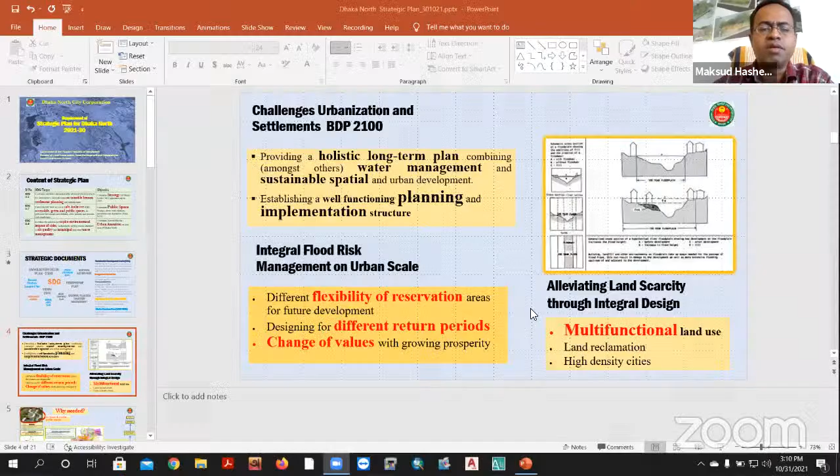First thing, I was posted in this Dhaka North City Corporation early this year. I thought there should be a strategic plan at city scale, so I was making a TOR for a strategic plan of Dhaka North City Corporation covering city management activities. We do have that content of a strategic plan.

First, we should formulate a strategy for this North City, including a public space strategy, which is the most active part of the city. We also have urban amenities like solid waste management, community health, and so on. If we see the strategic documents at national level, we have the Bangladesh Delta Plan, SDG, Transport Plan, the 8th Five-Year Plan, and the Perspective Plan. These are all policy level documents.

So we should make some spatial interpretation of these. First, if we see the Delta Plan, our first strategic level plan, it speaks about a holistic, long-term plan blending water management and spatial development, with a well-functioning planning and implementation structure. It includes integral flood risk management, flexibility of reservation areas, different return period designing, and changing values with growing prosperity. It also speaks about multifunctional land use planning.

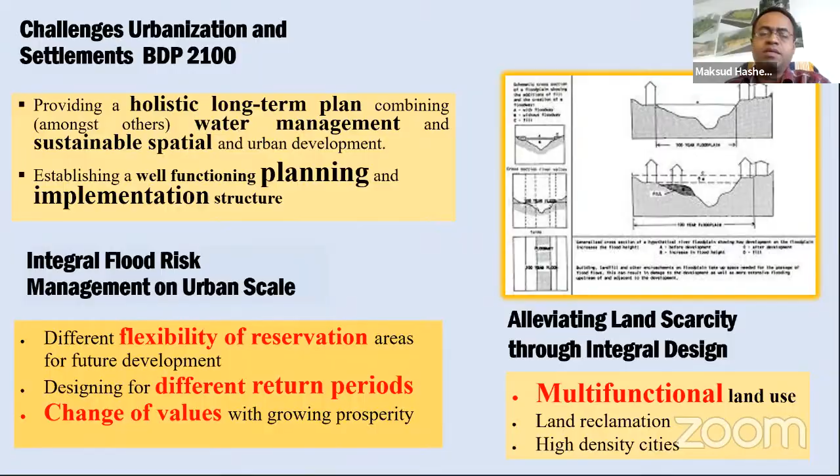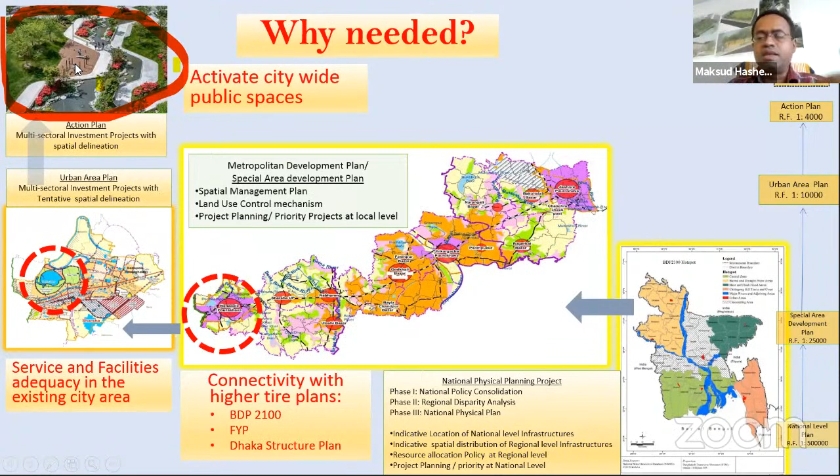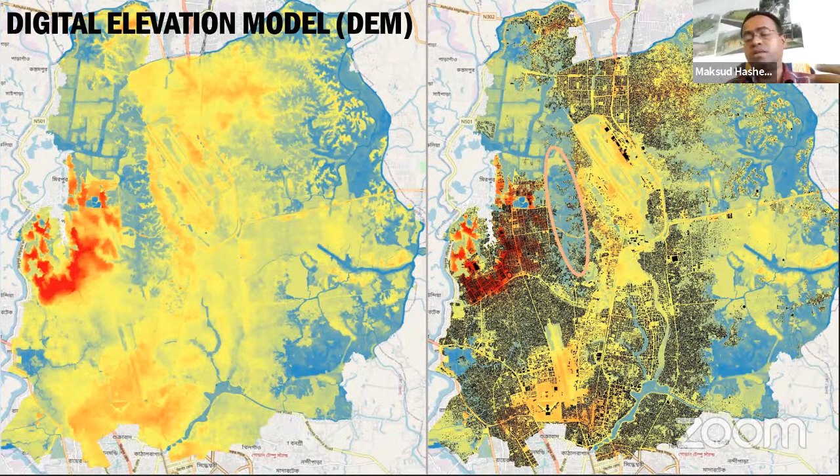If you see the digital elevation model of Dhaka, we see ups and downs—some up areas shown in red, and some lowlands. These ups and downs, the elevation, should come under planning considerations during the design and planning of city management or city infrastructure.

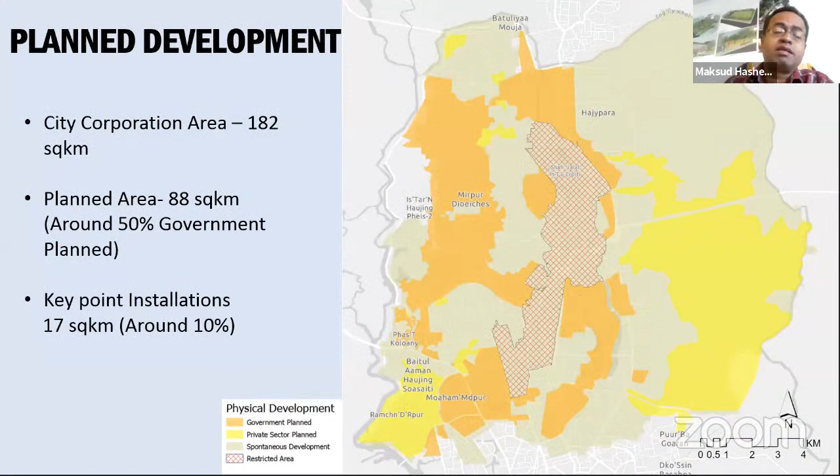If we look at the total city, almost everyone says Dhaka is a very unplanned city. But if we see this map, about 50% of the city area is planned—meaning we have a regular grid-iron pattern, half developed by government bodies like PWD, NHA, RAJUK, and some by private developers. About 10% of the inner area consists of key point installations like airports, Dhaka cantonment, etc.

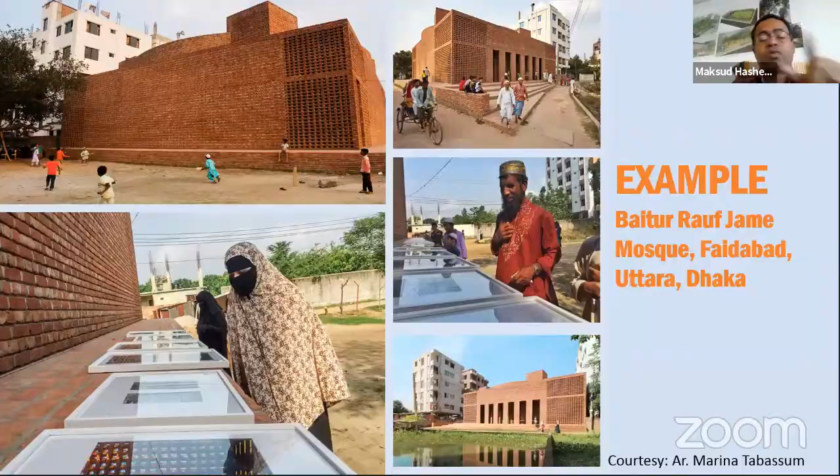আরেকটা বিষয় হচ্ছে ঢাকার পার্ক অ্যান্ড ওপেন স্পেস। এগুলোকে কমিউনিটির সাথে অ্যাক্সেসেবল এবং ইউজেবল করা একটা বড় কাজ, এবং স্পেশাল নিড যাদের আছে, ডিসেবল পিপল, তাদের অ্যাক্সেস নিশ্চিত করা দরকার। এগুলোর একটা লং ক্লক সাইকেল আছে, ২৪ ঘণ্টার সাইকেল, সব বয়সের এবং এজ গ্রুপের লোকের জন্য যাতে এটা ব্যবহার করা যায়। আরেকটা জিনিস হচ্ছে ঢাকা স্ট্রাকচার প্ল্যানে আমাদের একটা গ্রিন করিডোর প্ল্যানিং আছে। এটাকে ব্যবহার করে আমরা যদি কমিউনিটি পর্যায়ে পার্ক এবং প্লেগ্রাউন্ডগুলোকে গ্রিন নেটওয়ার্ক দিয়ে ইনক্লুড করতে পারি, তাহলে আমাদের ইকোলজিতে একটা বড় কন্ট্রিবিউশন চলে আসবে।

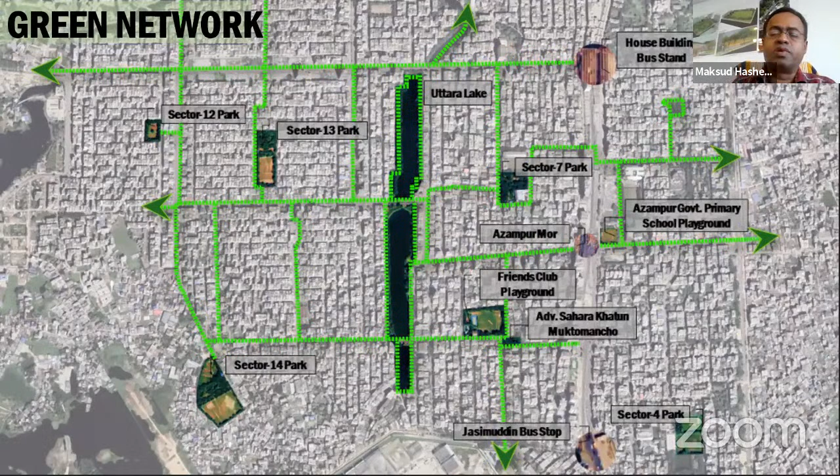And another thing is our blue network. If you can use these canal networks for transportation, recreation, and public space integration, that will add a great value towards Dhaka.

Another thing is community health. Last time during this pandemic period, DNCC converted one DNCC market into a Corona Hospital. So that was a great asset. I think higher order health facilities should also be provided by the Dhaka North City Corporation.

Another thing is bus stops. If you can facilitate this bus stop or transit oriented development, the current lifestyle or quality of life will increase much more.

One of the major functions of Dhaka City Corporation is maintaining solid waste management. So we have only one sanitary landfill, and it's outside Dhaka North. So we are trying to plan 2 or more sanitary landfills within the city that will contribute to less carbon emission, less timing, and the process will be much better. So this is all. Thank you, everyone.

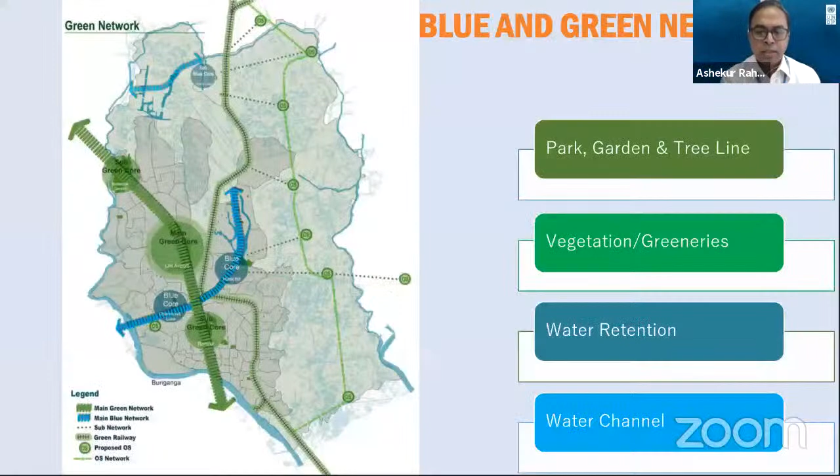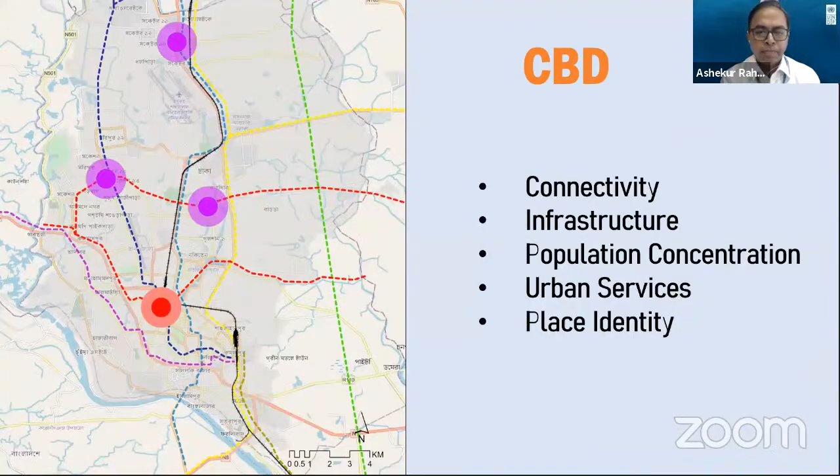Thank you, Mr. Maksud Hashem. I think this has been a wonderful presentation, very stimulating, and thank you also for staying within the time limit. So I hope this will spark a lot of questions, feedback, and comments. You have taken us through the present urban planning discourse of Bangladesh, given us some idea about the urban planning ecosystem, underscored the issues of the land use plan, focused on the public space, brought in the concepts of the green network and the blue network, and touched on transport and sewage management issues. I think this is very relevant and pertinent to the subject matter of today's technical session. I hope our panelists will shed further light on this, and we may get back to you again if there are any questions, and we might have other opportunities to hear a little bit more from you.

So now at this stage, I would like to invite Jerry Chen, who is the senior urban economist of the World Bank. Jerry is an MIT graduate, and an infrastructure investment professional with experience in the public sector, private sector, and multilateral financing institutions, covering different parts of Asia, including North America, Sub-Saharan Africa, and the Middle East region. He has been working with the bank based in DC, particularly as sector coordinator for urban infrastructure and disaster risk management. So with that, Jerry, thank you for agreeing to make an intervention and connecting today. Over to you.

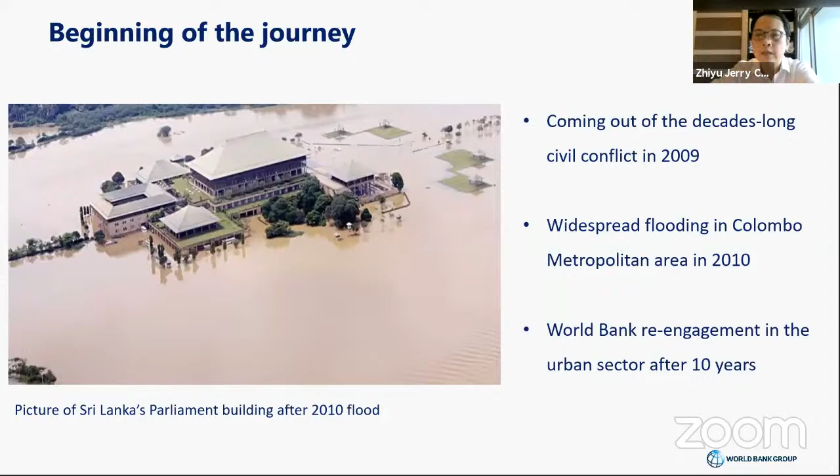So at 2010, we were discussing with the government then how do we support them, and what is the government's grand vision to start to revitalize the capital region of Sri Lanka. It needs to start from somewhere.

After a lot of discussion, we made a decision with the government together to take one entry point: to tackle the urban flood issue through World Bank support. I think Mr. Maksud also mentioned this important issue. It's very relevant for Dhaka and for Bangladesh in general.

But we also agreed it shouldn't just look at the urban flood issue. It should take urban flood management as an entry point, but also stimulate broader urban transformation, which was critically needed at the time for the country to stimulate growth, revitalize economic development, and create jobs for the people. These two points were very clear and were considered the principles of our re-engagement.

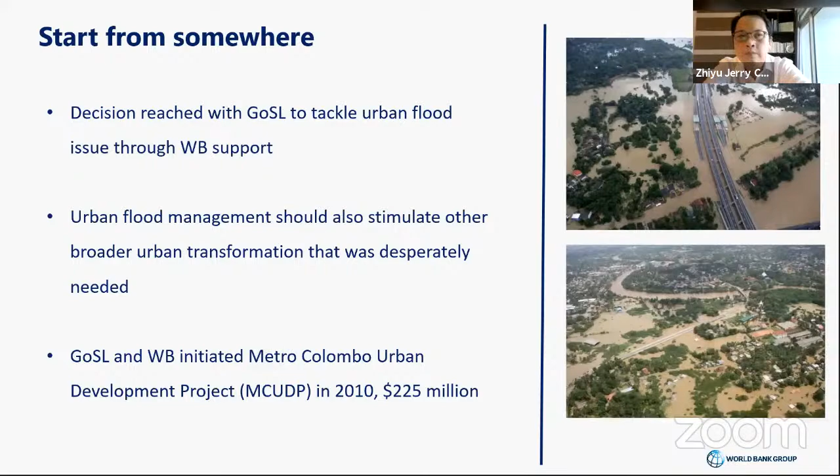Within that background, the Government of Sri Lanka and the World Bank initiated a project, World Bank financed, called the Metro Colombo Urban Development Project, MCUDP, in 2010, totaling 225 million USD. As of today, the project is more than 95% implemented and disbursed, with only one big package remaining, to be completed soon. So I'll be able to show you some of the interesting results.

I think everything, as we have this high-level agreement with government, all the work needs to start from evidence-based planning. So we looked at the Metro Colombo water basin area, which goes beyond the city municipal boundaries, including quite a few municipalities, including Colombo Municipal Council. There was also a lot of hydraulic modeling work done, very rigorous, with a very prestigious international firm supported by the World Bank, and we did a lot of rainfall data update.

It was very interesting — as we did that in 2010, what we realized is what used to be a 50-year return period rainfall intensity at the time had become a 20-year return period. So we did see the real impact of climate change through collecting and updating this data.

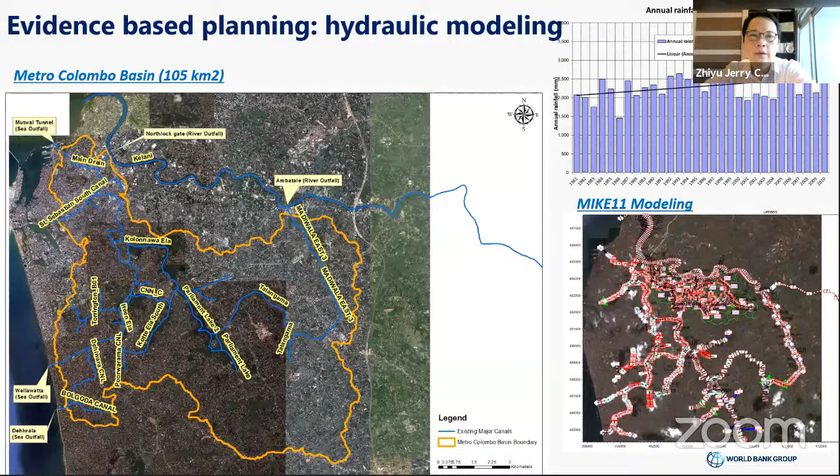So the overall strategy we took, which is also the hydraulic strategy, is that at the upstream part we should try to divert the water. We have a lot of investment identified to support that strategy, so the water doesn't come into the Colombo water basin to the extent possible. While in the middle part of the Colombo metropolitan region, we should try to retain — so a lot of retention capacity is needed and needs to be created and preserved.

I'll also talk about an interesting project on wetland later in my presentation. When it comes to the downstream part of the water basin, we should try to discharge to the extent possible, letting the water go out to the sea. So we had a lot of investment, basically rehabbing outlets to the seafront from the drainage system.

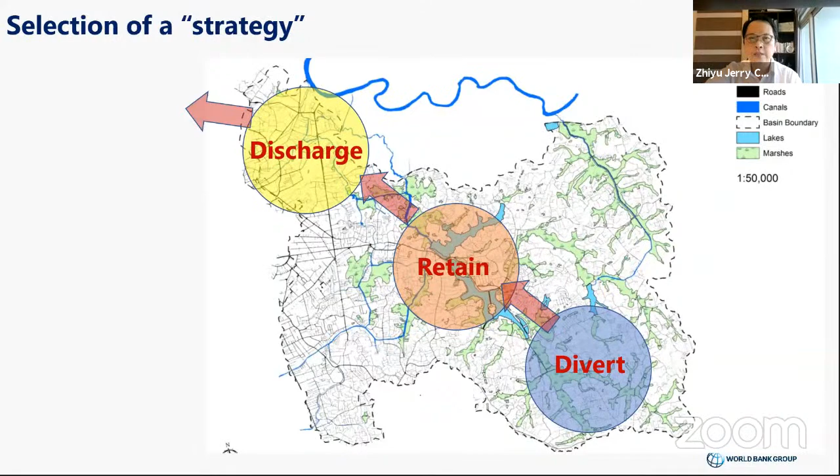That's an overarching strategy, which at the time was very clear and strong. As we go out to stakeholders, people very quickly understand what we want to do, because if you show them a list of 30 or 50 projects, people usually don't fully understand the rationale or idea behind it. So this was the scheme we used a lot at the early stage of the project design phase.

This is a very holistic process and plan that brought us to this investment identification stage. So this didn't come out on an ad hoc basis - it's not just saying I want to do this and I want to do that. That's not how it worked.

What's also important is that after implementing all these investments, we know what the end result will be. And the end result is not zero flooding in Colombo region - no city in the world can afford zero flooding. So we can only ensure a reduced level of flooding according to certain return periods of rainfall and the level of water tide from Kelani River, the bigger river on the northern side of the metropolitan region.

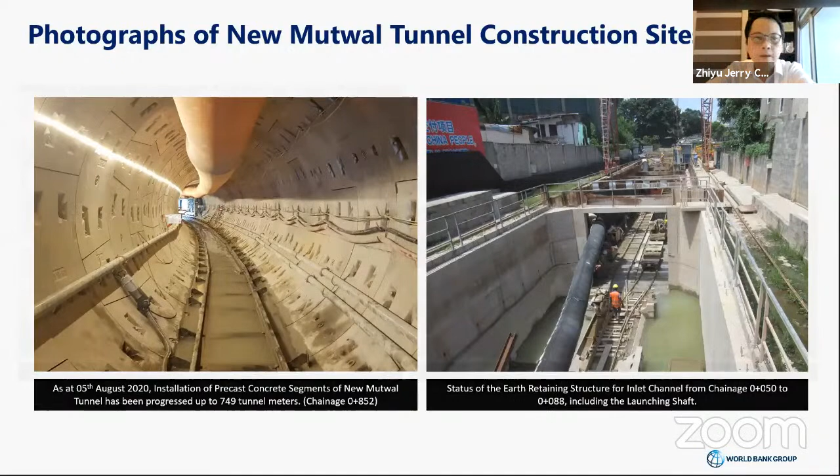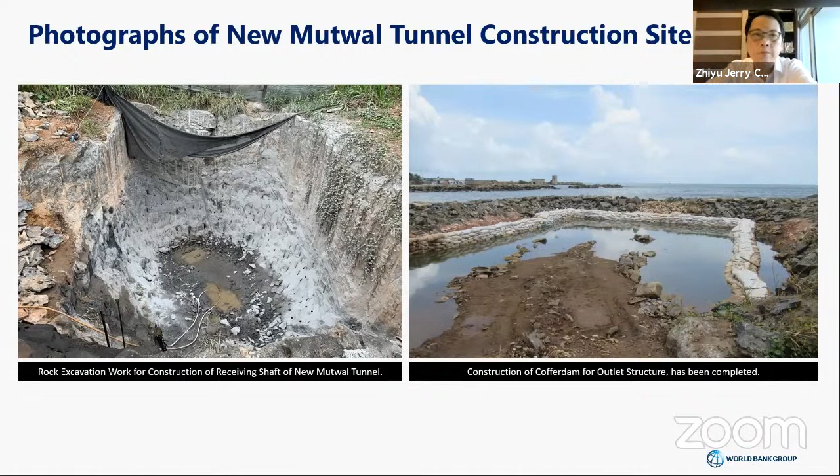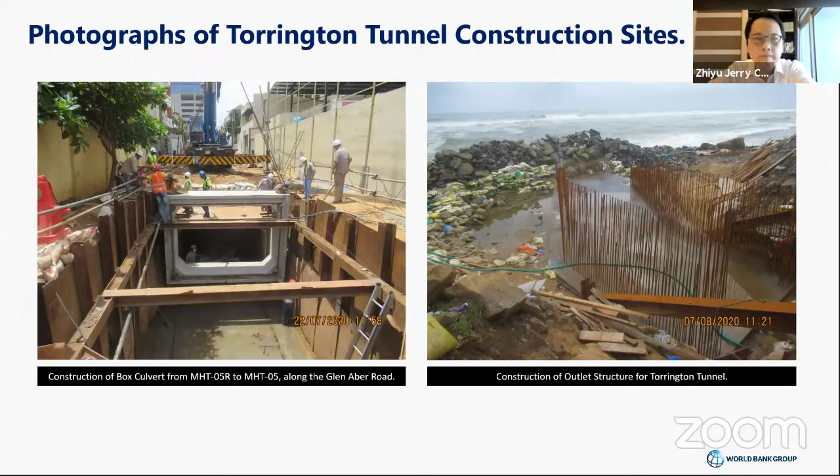This again is part of the Mutwal tunnel - rock excavation work that was going on at the time. As I mentioned, this is the outlet structure construction for one of the drainage systems to the ocean front. Some of the work going on in the middle of Colombo Municipal Council, and this is the pumping station.

We have some small scale drainage systems, but what I'm showing you is some of the larger scale work, which was very difficult from the design stage, from the procurement stage, and not to mention the construction stage - causing a lot of disturbance to traffic and people's daily life. So a lot of good communication strategy is needed, along with good participation and consensus building.

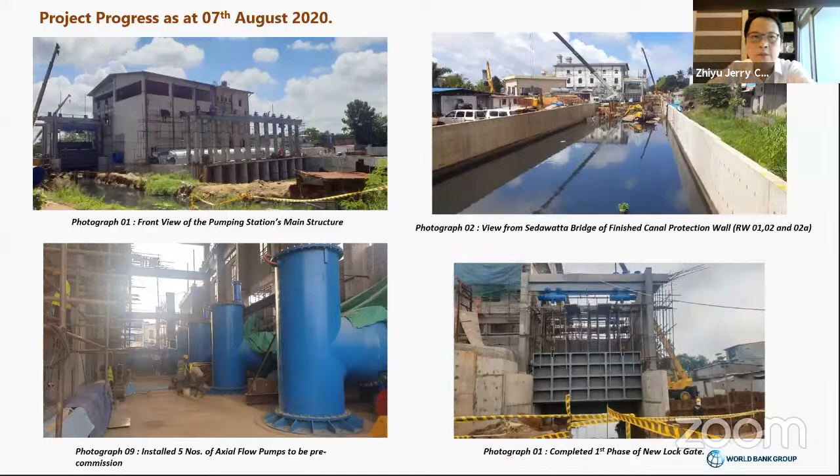It's been a 10-year process so far, and with only 10-15 minutes to go, I won't be able to tell you all the details. So let me pause here on the flooding part. The second part of my presentation will show you how we used urban flood management as an entry point to address the broader urban transformation demand and stimulate growth.

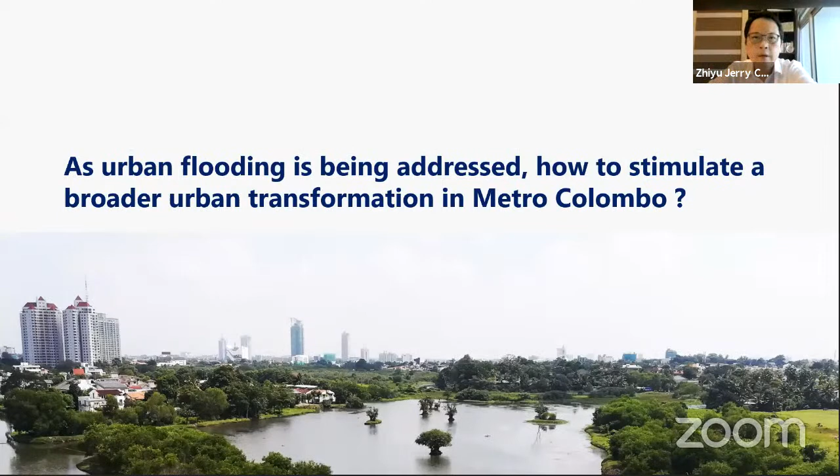I'll use one example. As we were designing the project, we observed huge potential in the green ecology resources in the middle of the metropolitan region - this photo is from only 1 kilometer away from the Parliament building. However, as we were walking around the sites, we already saw a lot of encroachment and illegal construction happening.

It was not well regulated, and there was a lot of interest in continuing that pattern. At the time, there was heated discussion in the city and country about why we should preserve these wetlands. People would say, let's use it for development because we don't have sufficient land. That's an interesting question - if you go to any city, nobody will say we have sufficient land.

Every city will tell you we don't have sufficient land. And the second one is people say, let's dredge it to develop an urban park. We need more urban park. We don't need wetland. So there's a lot of different voices there.

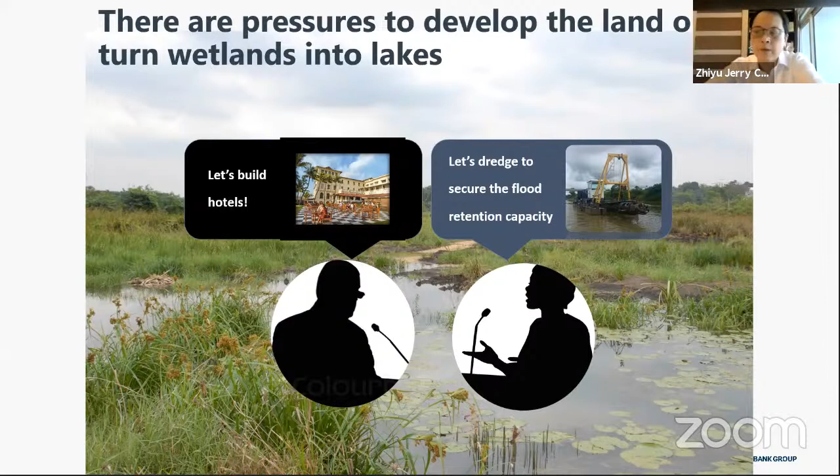So what we really started is the overall planning process for the entire water system, especially for this key central lake area. We didn't jump right into the wetland design. We looked at what other wetland resources and ecological resources are adjacent to this area, what systems could connect them, and what the cultural heritage was. The old Kotte Kingdom rampart was also there, and there's huge tourism potential too.

So I'll also show you this - some of you may recognize this, it's the famous necklace system from the city of Boston in the United States, designed by the famous landscape architect who designed Central Park in New York City. This is the map our client government at the time took out and showed us. They said, we want to do something like this, as we were showing them this map for Colombo. So we were very encouraged as we got into this stage of discussion - you need to have this high level vision, and you need to be willing and encouraged to benchmark yourself with the best metropolitan areas, the best cases in the world.

This is one of the photos. We also went to Singapore to learn from their wetland park design, so we borrowed a lot of interesting examples from Singapore. We got a famous organization from the UK for wetland preservation to come support the government. We later realized there was a lot of potential for biodiversity - some of the birds and animals we were totally not aware even existed. It's actually become a very good spot globally for bird watching, so a lot of people who used to go to Singapore for bird watching are now switching to Sri Lanka, partially because of this wetland.

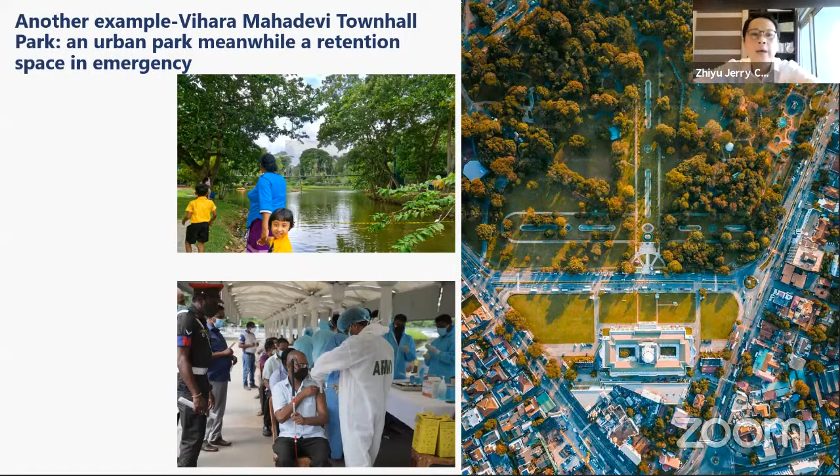Just maybe a little bit more on the second point, on the execution capacity. I can tell you, when it started, I think people were really figuring out how to do it. It's a big project for CMC and for other municipal councils under this project. They had been doing regular city level works, smaller scales, a lot of operation and maintenance kind of work. These large scale infrastructure projects, they hadn't really been exposed to.

But as the project carried on, they really built up their capacity. And from the bank side, we were very encouraged to see the dramatic change in their capacity and their commitment to this. I can tell you that actually this project does not have supervision consultancy, so all the supervision work was done in-house within the city and within the central ministry agency. They were able to really handle this and do a very superb job in making sure the works were completed in high quality.

On the institutional part, again, this involves multiple ministries, multiple cities, and cuts across different governments. There were 2-3 rounds of government elections during the life cycle of this project. But that also shows how robust this project design is - regardless of which government was there, this project design remained the same and implementation continued.

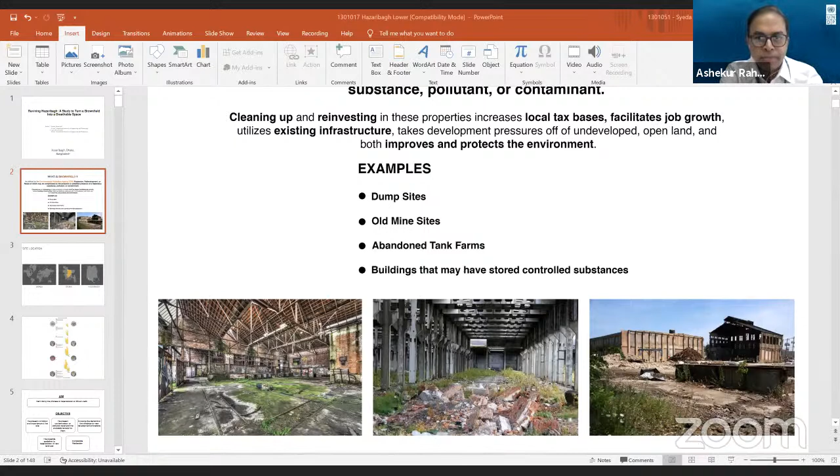My paper title is Reviving Hazaribagh: A Study to Turn a Brownfield into a Breathable Space. So what is a brownfield? A brownfield is defined as expansion, redevelopment, or reuse of land which may be complicated by the potential presence of hazardous substances, pollutants, or contaminants. As we know, the Hazaribagh area was established around 1940, and it was used as a tannery area in Bangladesh.

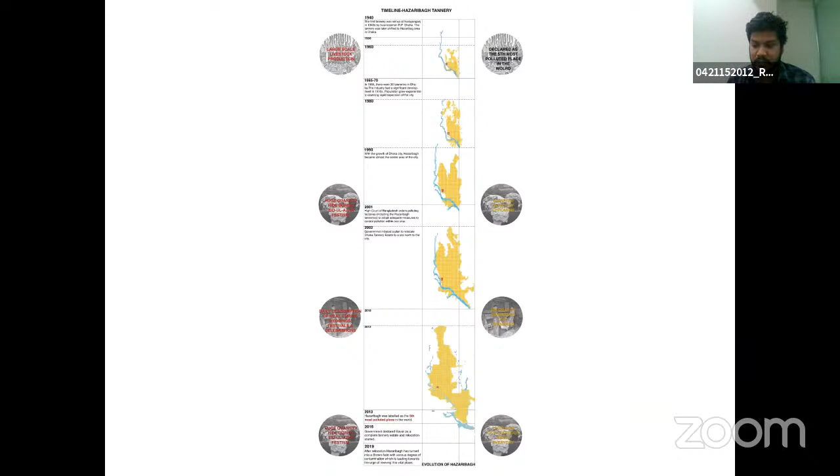I am going a little bit fast because the presentation is longer, so please feel free to ask anything if I'm going too fast. The aim of my thesis was addressing the process of regeneration of a brownfield. The objective was to understand the present condition and importance of the site, the present contamination and pollution level, and the probable remedy for them, knowing the demand of the inhabitants, the new development procedure, possible guidelines for regeneration of new land use, and a compatible master plan.

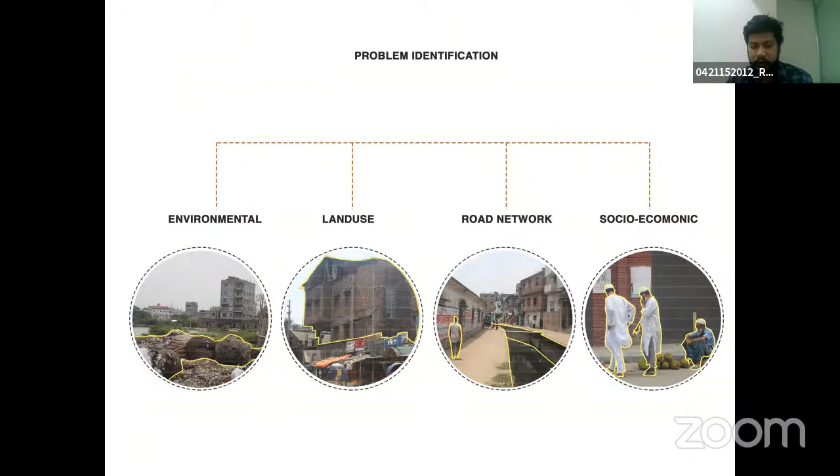For methodology, I followed identification of the problem first, and mainly worked on 3 steps: present situation, remediation, and future land use. So what are the problems? The problems were basically environmental, and there were some land use problems as the area is surrounded by residential areas, and we know the tannery area is a very polluting industry. There are also some problems with the road network and the socio-economic condition.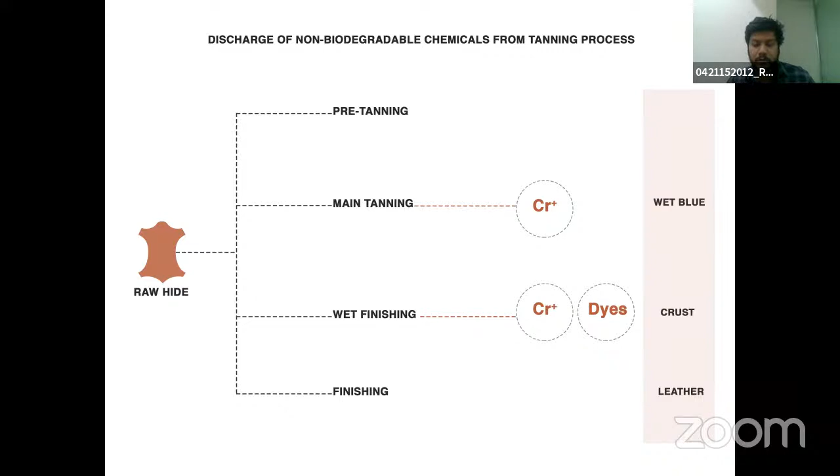So what are the environmental problems? They regard the wet process of tannery—we know that many chemicals are used in the tannery process, and the main pollutants are chromium-based chemicals. We started some research also when I was working on this project; a study from MIST University was running, so we collaborated with them and used their research results.

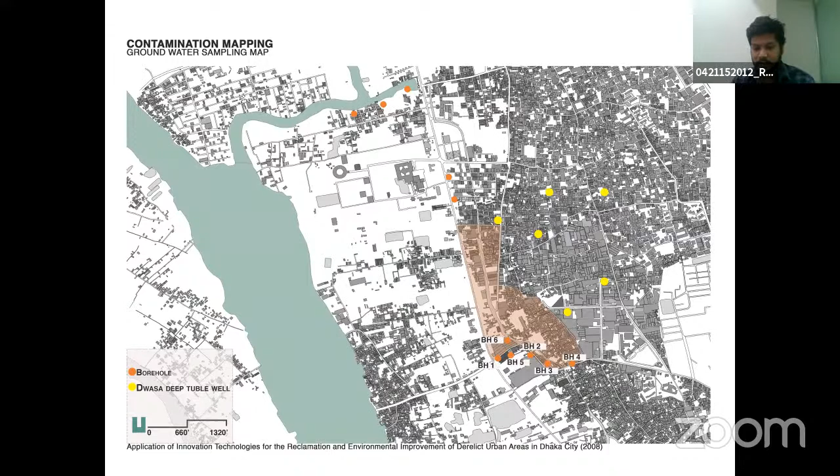When we studied the contamination situation, we found contamination problems in these spots. These spots were tested for convenience, so we can have an idea of the contamination situation.

We found that if there is a residential area around, the remediation value of the contamination should be lower than 300 milligrams per kg, but here in many points of that Hazaribagh area, the contamination level is 27,000 milligrams per kilogram. Here are some more points where data was collected.

Here are some values of chromium, cadmium, and lead contamination, and these are the main pollutants actually.

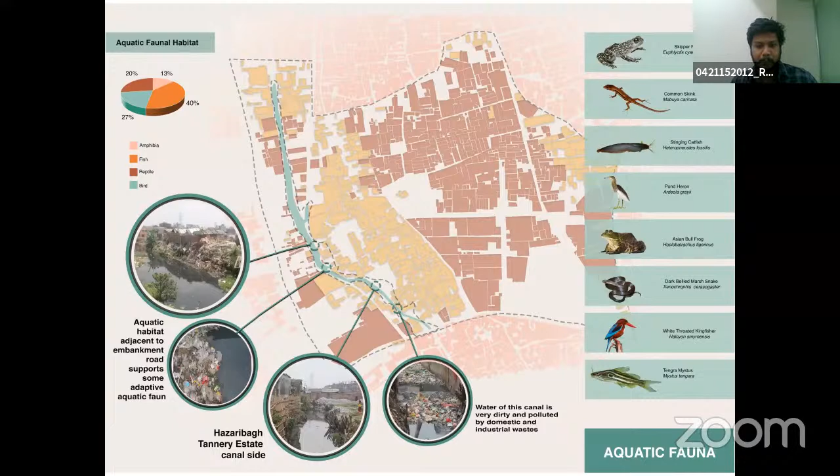We also did an existing fauna study. We can see huge birds and animals there. Also there is a canal, and we can find some fish and birds there. And these are some faunal study images.

Land use and ownership: there is a big problem with the land use pattern, as the total area is almost 130 acres, and most of them are privately owned land.

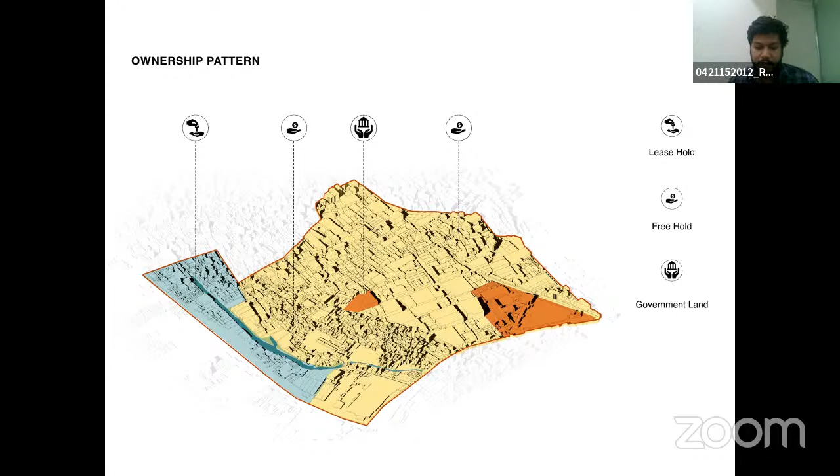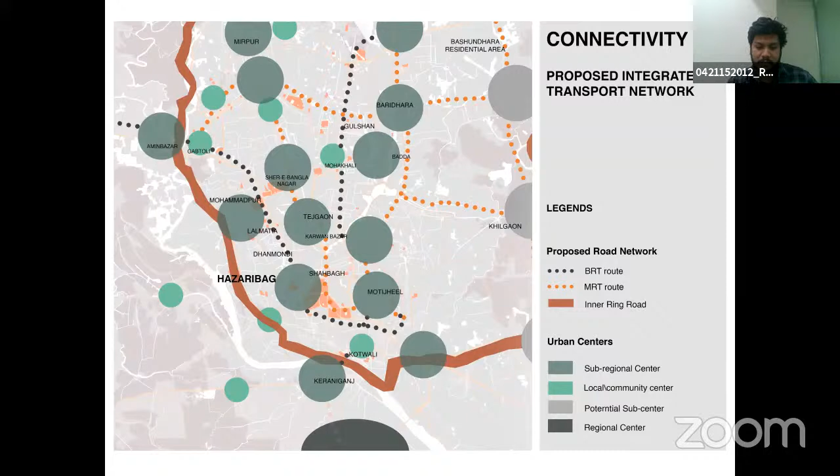Here's the road network connectivity within Dhaka city around the Hazaribagh area. We can see that Hazaribagh is very much connected with other main attraction points of Dhaka city.

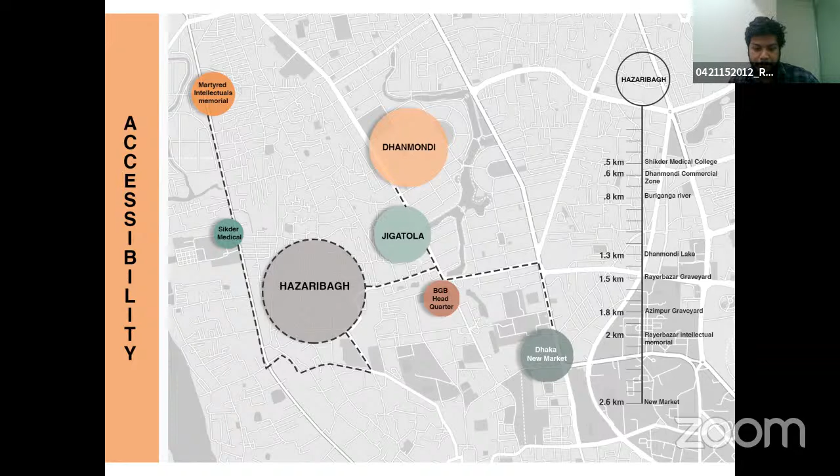How did we do the data collection? We did some questionnaire surveys with experts, business owners, and local inhabitants. These are some questionnaire samples.

These are some of the businesses. Most of the business owners in that area were, now, 29% leather shops and 35% chemical shops.

So what do they want? The business owners always saw the Hazaribagh area as a commercial area because of the history of that area.

But what are the expectations of the local inhabitants? The local inhabitants, who mostly live there, want that area to be residential. Some experts want it as an open or recreational area because of the contamination.

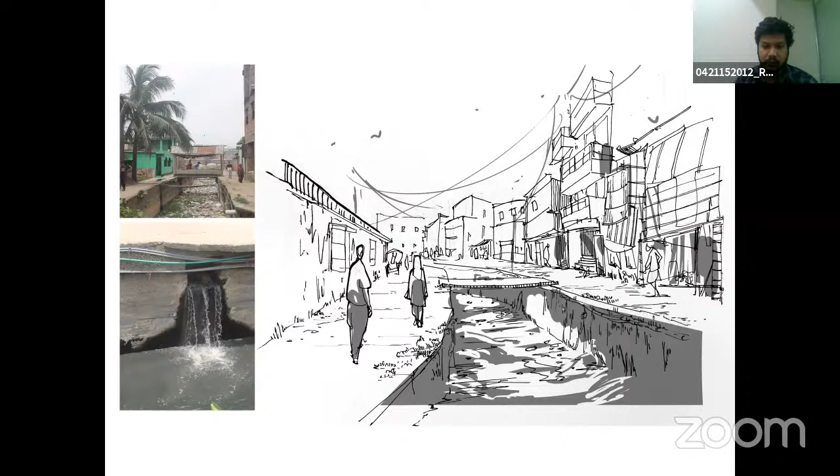This was 2019 of that Hazaribagh area, and some local people, local users of that area.

We found many spots with raw hides, and the main wet process, though it was not running in that area, was used for dyeing and drying industry. But it also generated a lot of waste in that area.

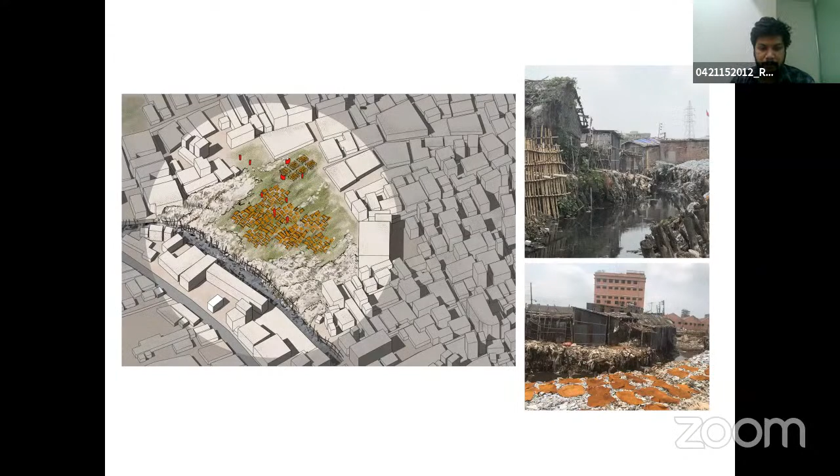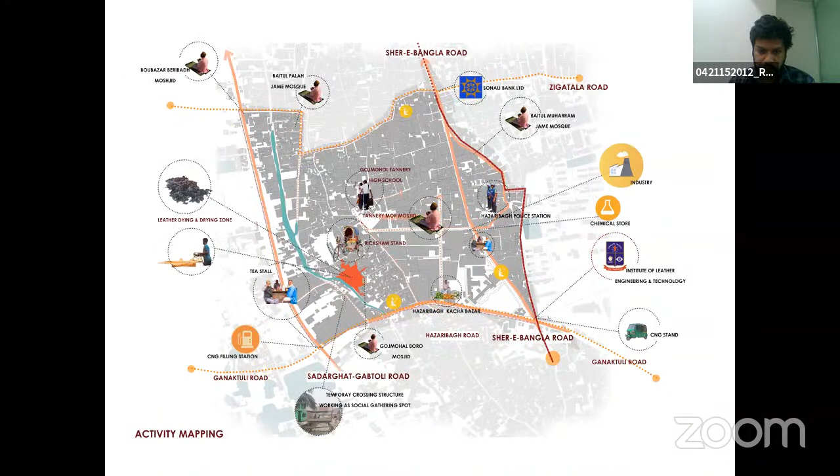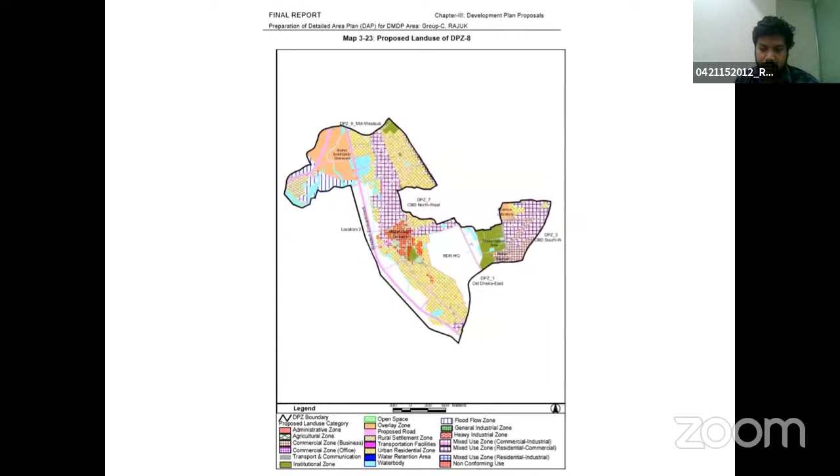These are some images of that area. The area is shown, mostly, as residential, and some area is shown in previous depictions as commercial area.

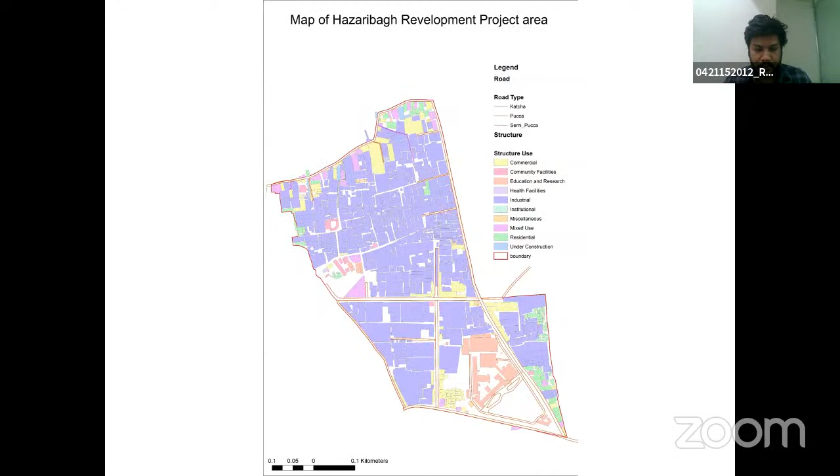At that time, Rajuk discussed and planned a redevelopment project. This was their considered area of redevelopment. Later, they came to this site.

We did some SWOT analysis, dividing the whole Hazaribagh area into several parts. A huge area of the site is suitable for development, connected with various important economic zones in Dhaka city. Proper development can create an impact on the whole city.

The weaknesses: it is a heavily contaminated area, and contamination remediation can take several years according to the chosen process of remediation.

What are the opportunities? After remediation, the development of the site area can effectively connect old and new Dhaka. This will significantly increase the value of this area.

What are the threats? A lack of proper remediation process can slow down the next development phase, and if contaminations are not properly eradicated, it will create further health and environmental hazards like the present condition.

So, determination of the remediation process. For remediation, we divided it into pre-treatment and ongoing remediation.

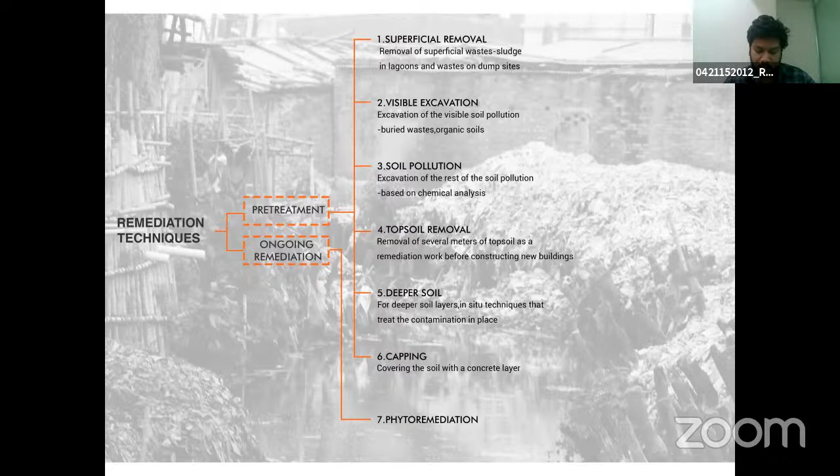Pre-treatment for the most polluted areas can involve superficial removal, visible excavation, soil pollution topsoil removal, deeper soil removal, and capping in some areas. The long-term process can be phytoremediation, which is a viable remediation process.

For pre-treatment, we found that the red-marked areas are mostly polluted, based on the research results.

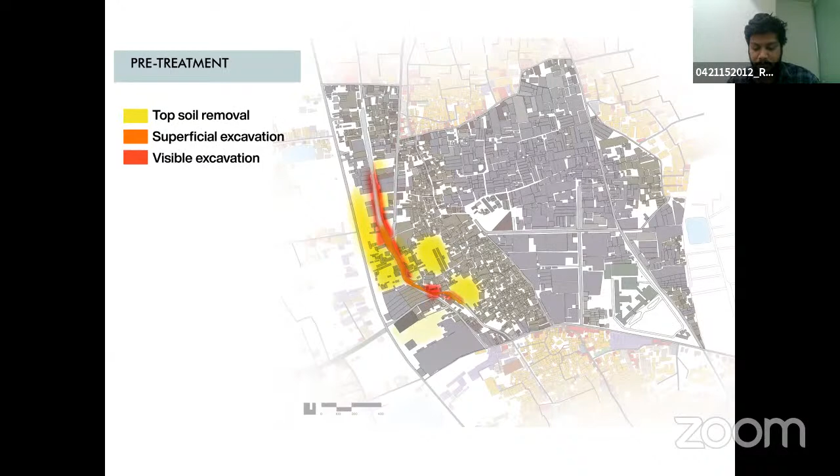We can use superficial excavation and visible excavation. Superficial excavation can remediate a big part of the pollution or contamination. Then we propose phytoremediation for the long process in the most affected areas. Phytoremediation is a process to remediate the soil and water using plants.

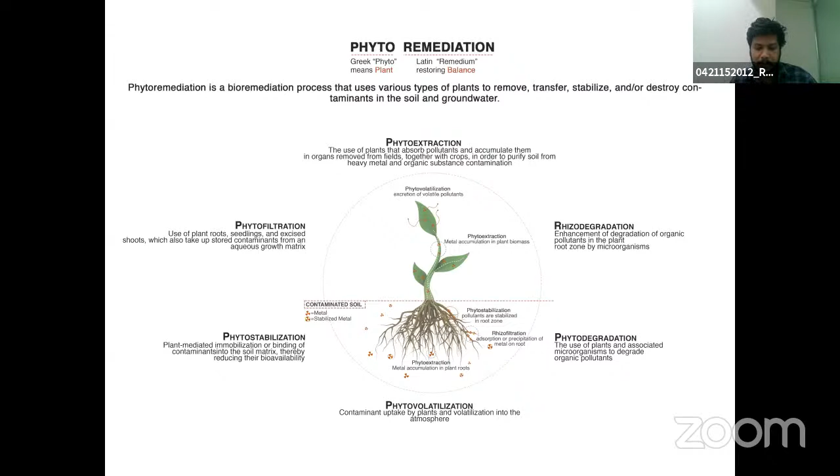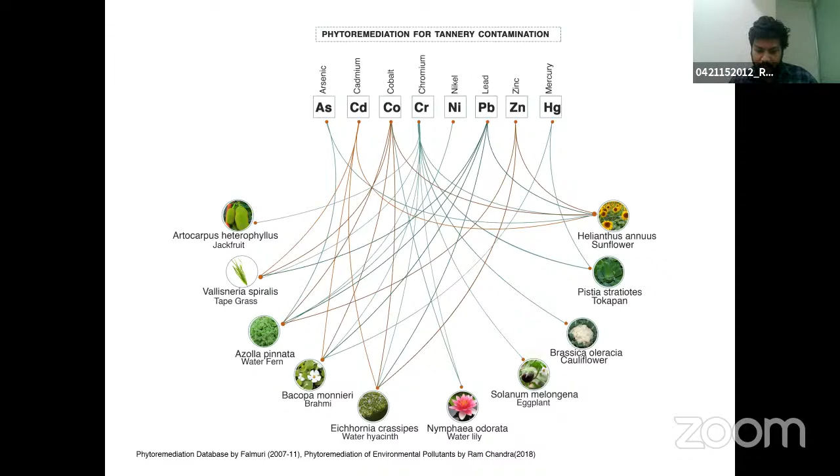There are some criteria of phytoremediation. We also studied some trees or plants which are from our local region and can remediate the soil and water. We studied some foreign studies and correlated it with our local context, which plants can be used here. So here jackfruit and sunflower, water lily, etc. can be used, can be remediated the soil and water also.

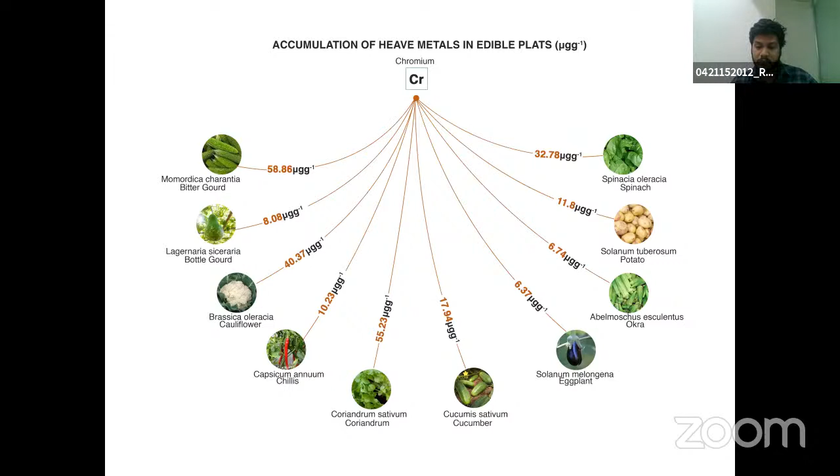So here are some more species which can be used as a remediation. There are some trees which can remediate the area, but if they are edible, people should not eat that vegetables or fruits immediately in the remediation process. If the foods are collected from that area, it can harm the people because of the chromium contamination. These are the absorbent of the chemicals, which can affect the people also.

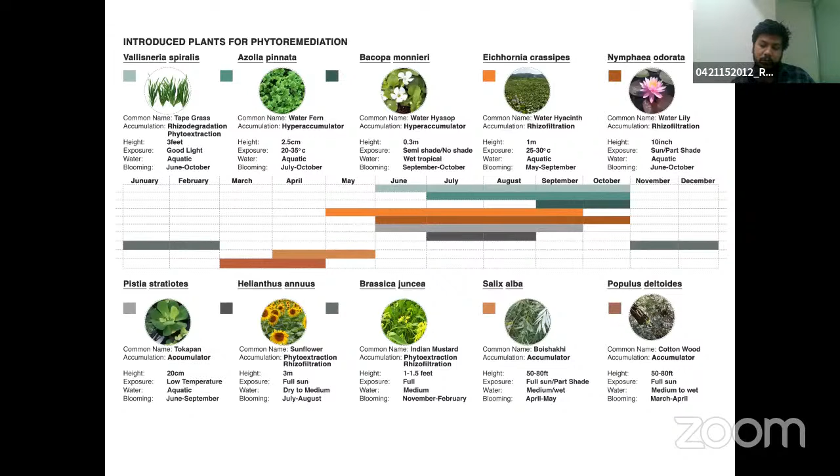Here is a chart showing the growing duration of different plants, which can be used in the phytoremediation process.

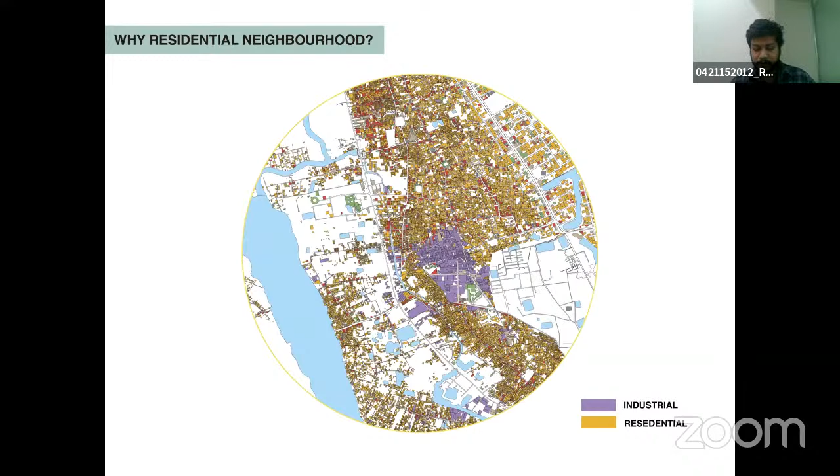So what will be the land use of the project? What should the land use of the project be? This is pretty confirmed that the area should be used as a residential area, as it is surrounded by a residential area, or some mixed use. It can be developed as some mixed use zone. Also, Dhaka is facing some land scarcity. The density is very high, so it can be developed as a mixed use area and a residential area.

Here's some housing demand study of Dhaka city.

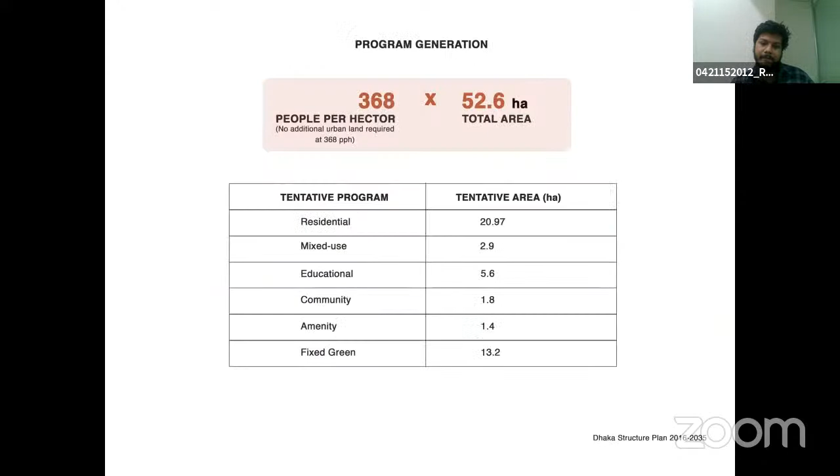So how should the development process be done? Here's an example of how it can be done. The land reclamation and the remediation process is the main concern at the first step. Earlier I mentioned the excavation, visible excavation can be done, and then it can be remediated slowly and redeveloped. Here are some steps of that process, visual representation.

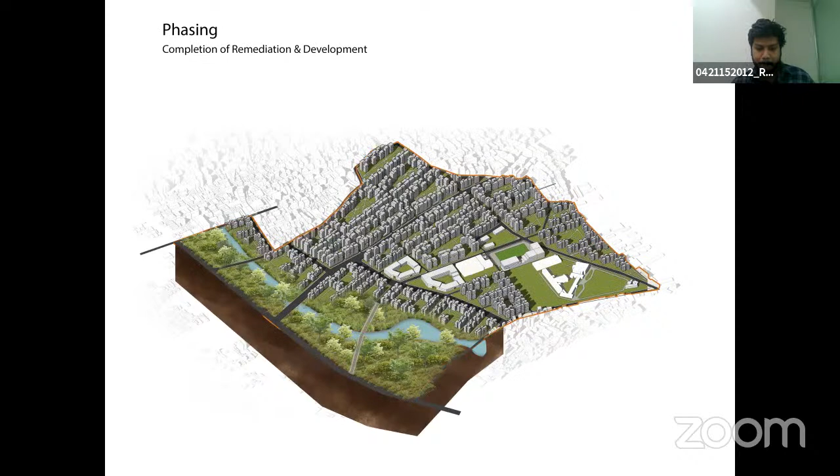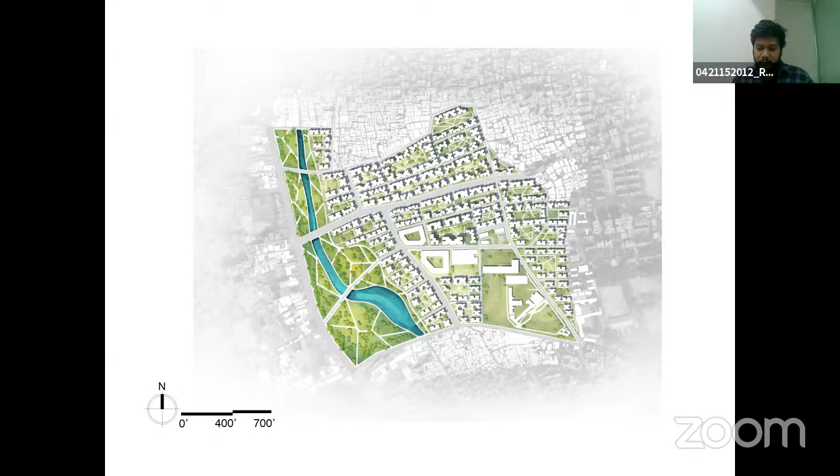So the master plan I proposed as the mixed use area with all the necessary facilities for the new development. The new development is necessary because the land has a very high value, and it can compensate the industry owners also, as they oppose development, and it can convince them to come to the redevelopment concern.

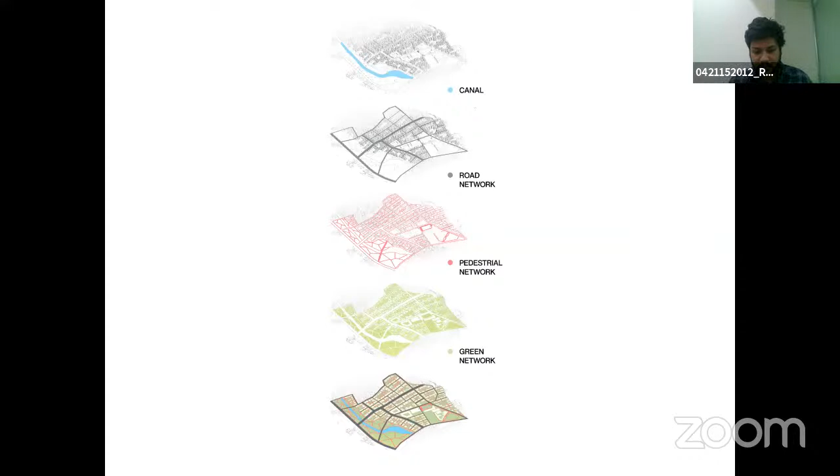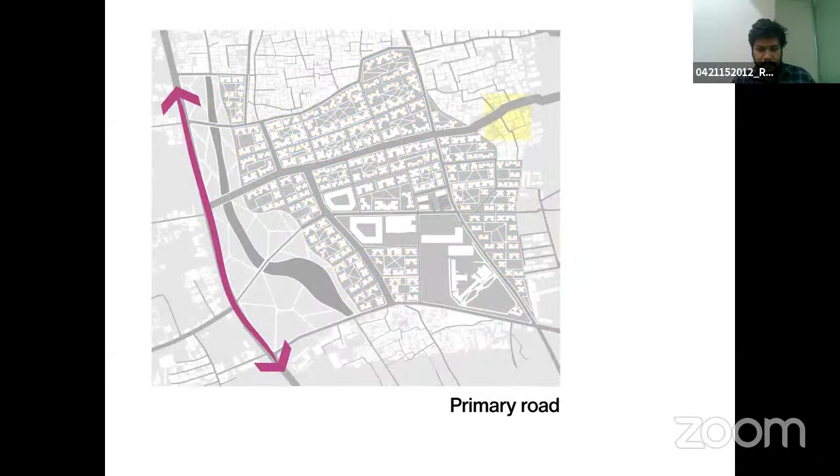So here are some proposed canal network, road network, pedestrian network, green network, and the full master plan. Some amenities proposed in the area, institutional amenities and mixed use zones, and other residential areas. So these are the zoning, the main road network, secondary road network, tertiary road networks.

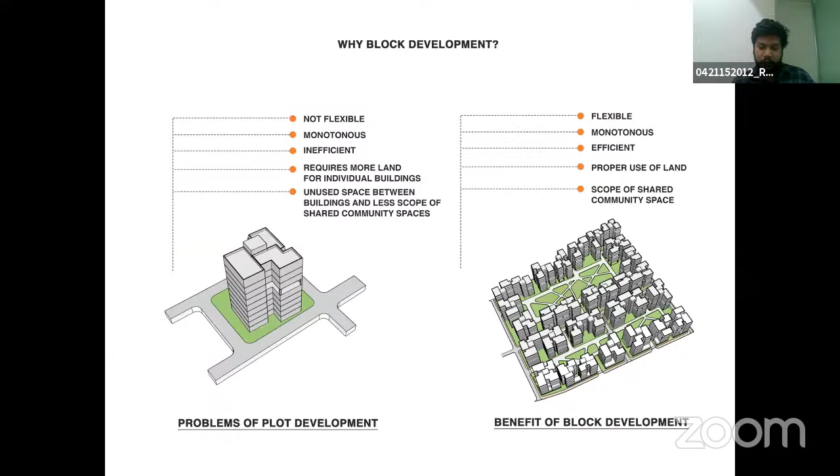Block development, we know the plot development and block development are two types of development. We are proposing here some block development to accommodate large areas of green and open area in this area. Here's an example of that area which can be done.

Some visuals of that development.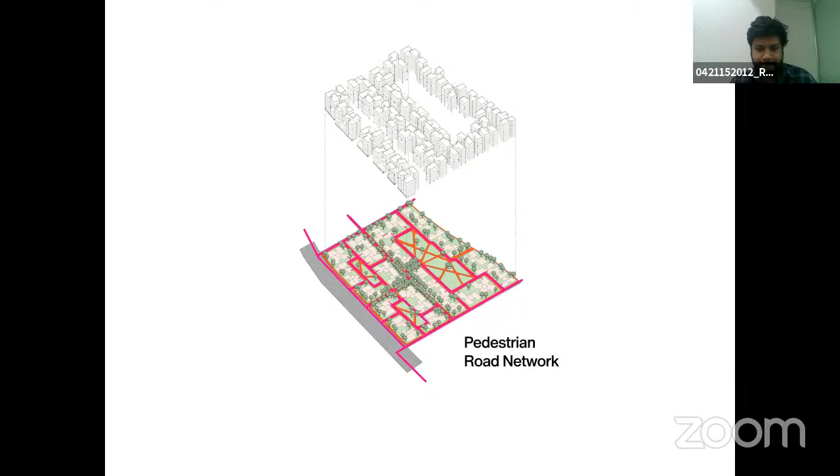No, please go ahead. If you could finish up in the next 2-3 minutes, that would be nice. Yeah, I know.

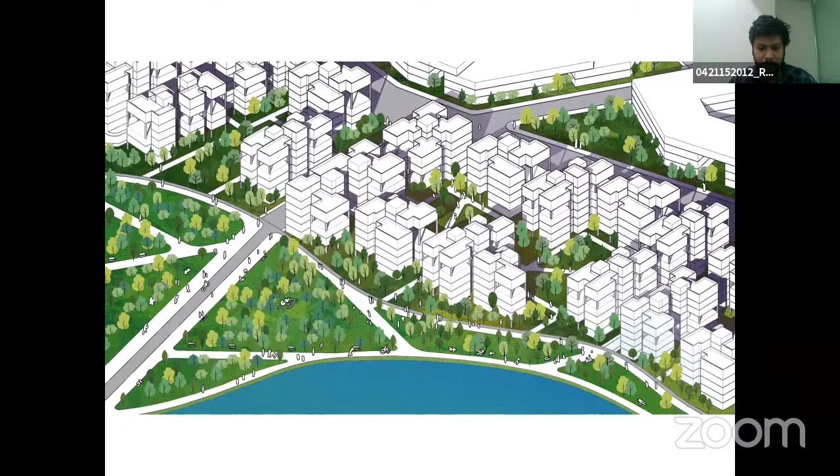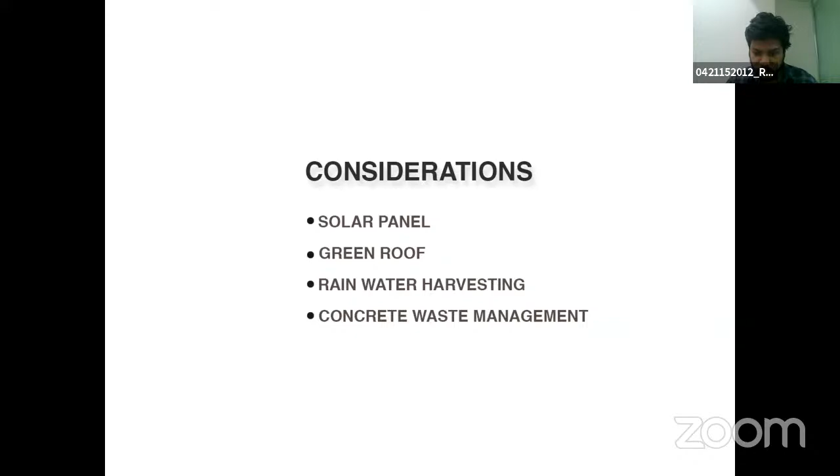The educational zone area, the canal area can be like this in future. Considering the future, we also can consider the solar panel, green roof, rainwater harvesting, concrete waste management, etc. for sustainable development.

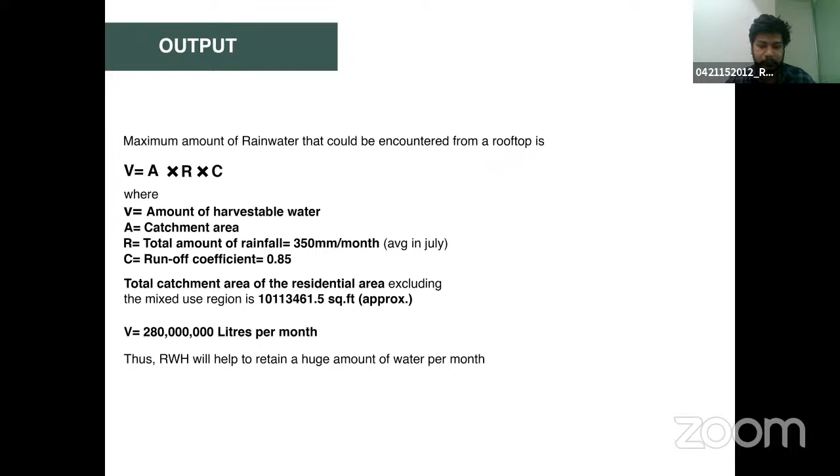Thank you. I also have a video, but I think in Zoom it will not be shown correctly. Should I play it?

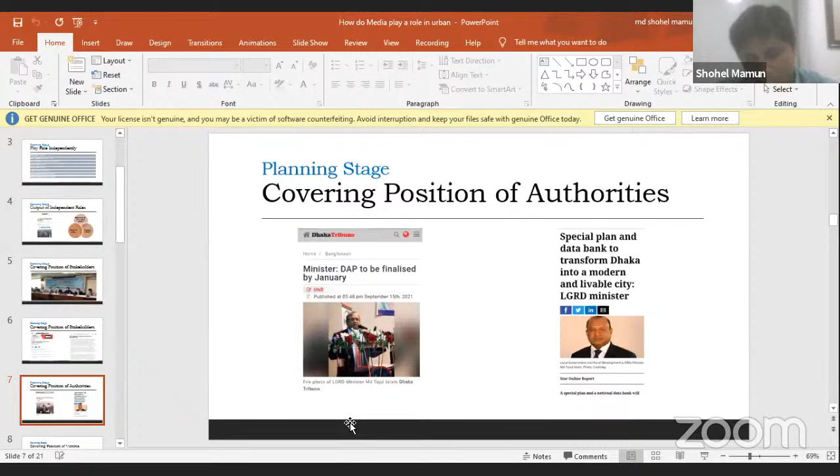Apart from this, media covers the voice of stakeholders, as it is a way to send their message to the authority. Media also covers the statements of the authorities, and media mainly focuses on inconvenient situations, as a poor plan is a big cause for hazard in the long run. A poor plan may cause mismanagement as well. Such an interactive role media plays is usually helpful for the stakeholders regarding the plan, to formulate a better or best plan for the citizens.

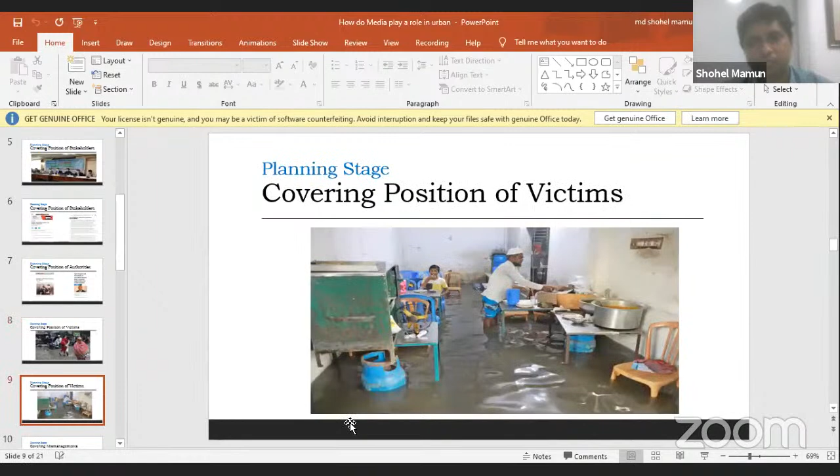There are some photographs you saw showing the mismanagement and the sufferings of the victims among the people.

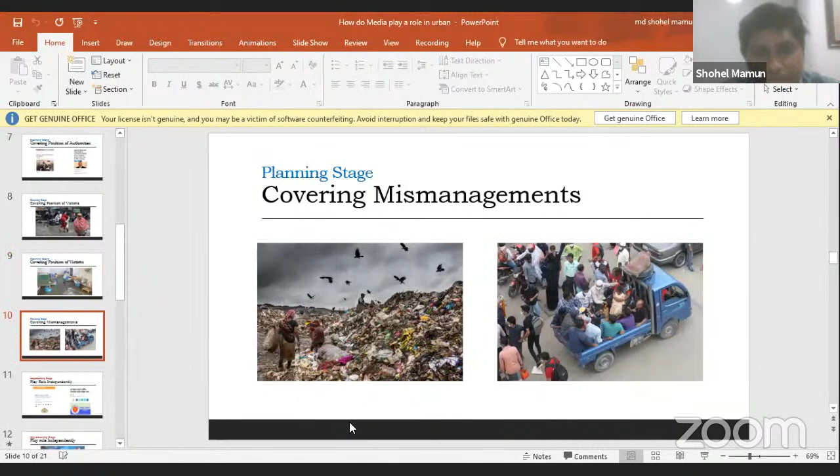This is the second part of my presentation: once a plan is finalized, the government decides to implement it. Actually, how does media play a role during the implementation of a plan?

I would love to share another video report. Please watch.

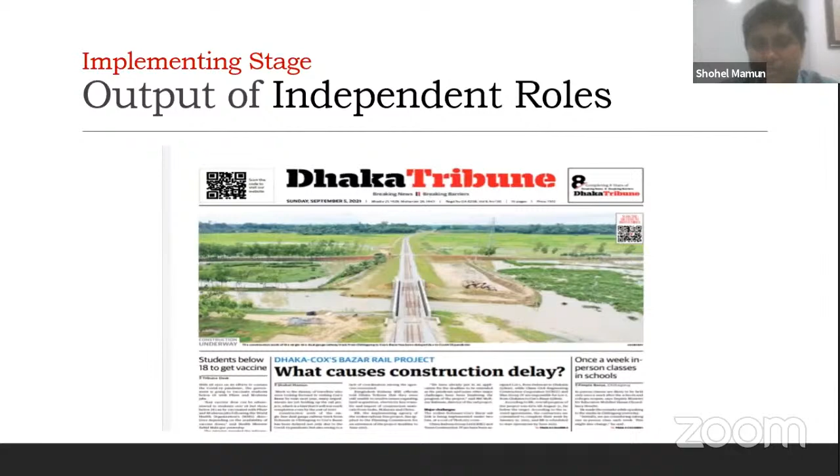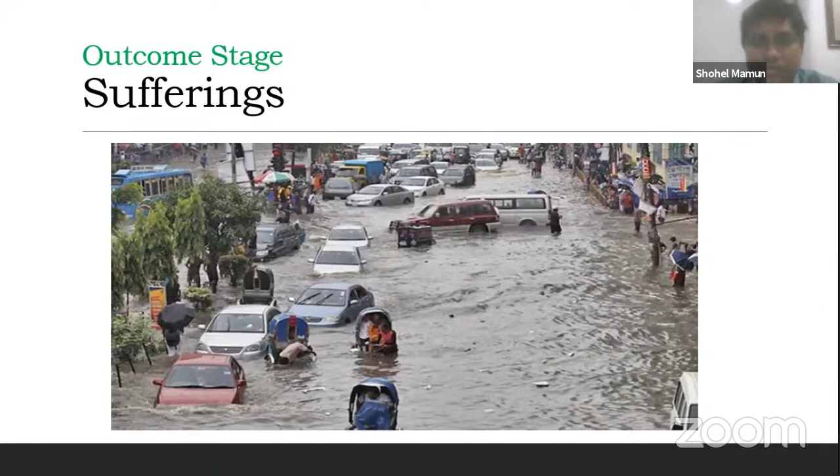Similarly, our journalists also pick up the sufferings of the citizens. This is a photograph in Dhaka. Here, crores of money were spent to remove waterlogging from the street, but the situation is not improved. Often media loves to criticize.

There is a development project, a U-loop in Dhaka. Such a U-loop was constructed for easing traffic in Dhaka. Once a project is not performed properly, the media loves to play a role in criticizing it.

For example, I highlighted two media reports. One is a railway project, another is about removing waterlogging. In the railway project, there was some error during the planning stage and design stage.

Therefore, a 134 kilometer railway line, once constructed, was later decided to be reconstructed. That is the result of spoiling public funds. So we think there is much scope to revise the plan before implementation.